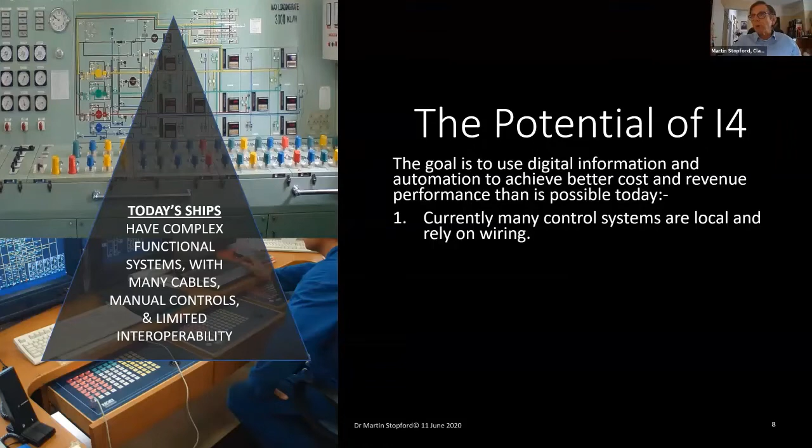Currently, many of the control systems on board ship are local, and the controls rely on hard wiring. There's a few Ethernets being run out, but most of it is hard wiring. I believe we should be replacing cables, controls with ship control area networks, SCAN, I call it. This is already being done in land-based transport equipment like motor cars, and it hasn't been done in ships because it's a more challenging task. They're bigger and more complex, but the opportunity is there to replace wires with messages.

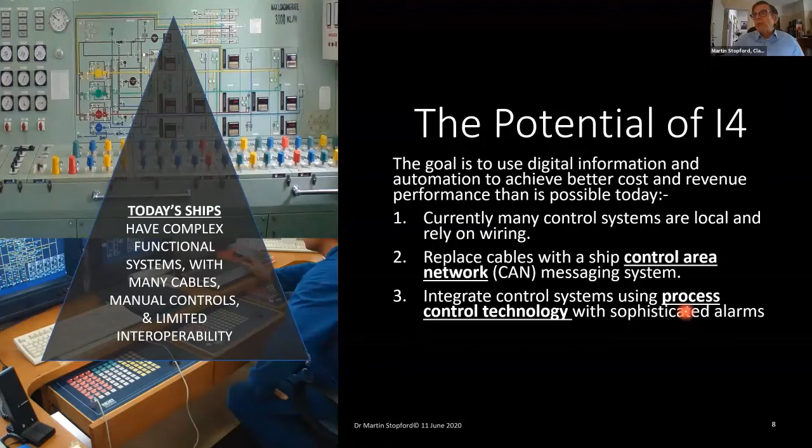And we need to integrate the control systems developed in this way by learning to use the process control systems that are used on land, for example, to run very big, sophisticated chemical plants. And I'm hoping the panel will talk about this a little bit, and automate parts of processes using algorithms where it's safe and viable to do. And so those are the things you do to run the ships.

But in addition, I've said we're flying blind. These systems are going to generate an enormous amount of information and record this information so that we can analyze it and use it to plan what is happening on board ship and in the fleet of ships, so that event logging will be automatic. At the moment, the managers on the ship spend time filling in forms. That will be history. It will all be done by the information systems.

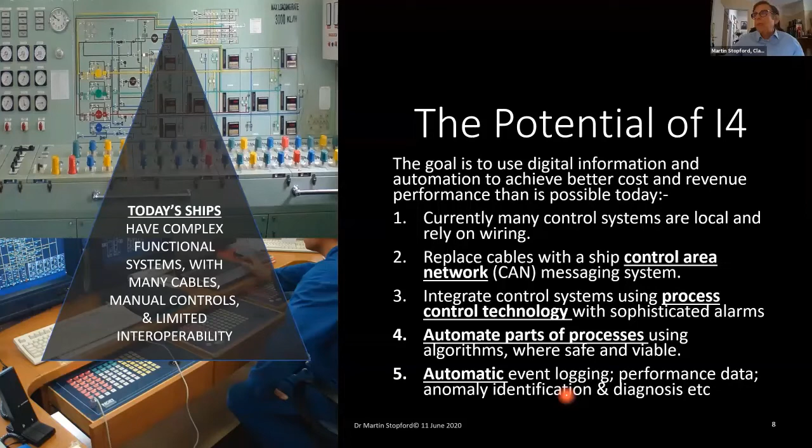And the performance data, anomaly identification, you collect that data and you use it to start to predict errors that might occur, problems that might occur, and prevent them so that you reduce the mechanical problems on the ship. And that really is the main goal. The vision is that we use I4 technology to cut costs. The strategy is to use digital technology to automate processes. The method is continuous improvement.

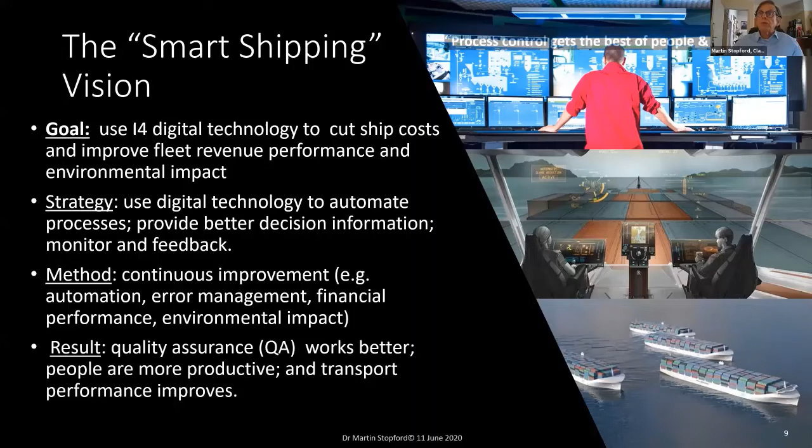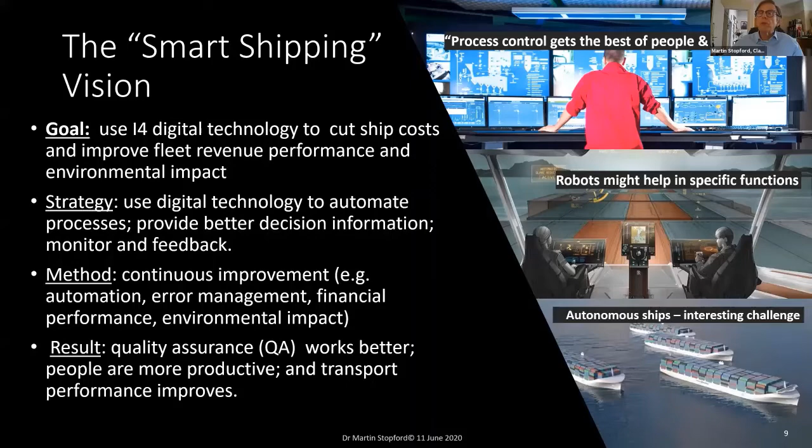You're not going to do all of this at once. You start a step at a time to do the things you can do today effectively. You make sure they work at sea. You make sure they give a financial return and a proper environmental impact. And the result is that your quality assurance works well. I'm a real believer in quality assurance. If you can get that to work, you move to a whole level of management. And you make people more productive, and the transport performance improves in ways that you couldn't even begin to imagine.

I'm not going to dwell on the next two slides, but I just want to make the point that we must have clear goals for costs and revenue. And this slide, this equation shows you the areas of costs on a ship which we can address. These are simple things that the people on the ship do every day today automatically. But with the I4 systems, we are going to be able to get these done much more effectively. We will control our operating costs much better.

We will lower the propulsion costs by optimizing every aspect of that. Never will a ship go to sea with an engine that isn't totally in balance all the time. If you're running a Formula One racing car, you balance at 16,000 RPM, you balance every cylinder, every revolution. You can do that for your ship's engine, and that's just a tiny little example. You reduce electricity costs across the whole operating system because you're monitoring them and getting feedback real time. You reduce your cargo handling costs because you have proper information about what's going on.

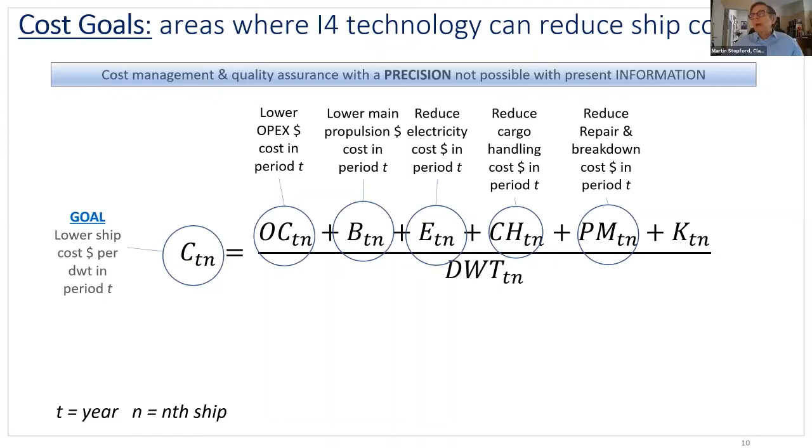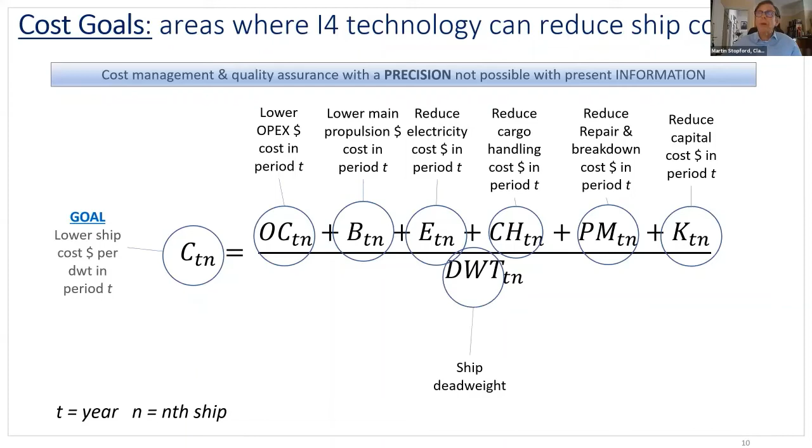I know this is very challenging and a lot of it is done manually, and that's the challenge, isn't it? Repair and maintenance, and the enormous amount of unplanned maintenance and repairs cause a great deal of cost and time. You'd be amazed when you track ships how much time is lost. This is stuff that can be dealt with by predictive maintenance systems. And of course, we use the capital assets far more effectively because there is somebody who is tracking the use of those and the real cost of those assets at any point in time. That is the cost side.

And on the revenue side, ships spend only a small proportion of their time loaded at sea. And once you really know what's going on, you cut out unplanned maintenance, you optimize performance, you get together with the charterers to integrate arrival dates so that you're not arriving and waiting, and you get confidence in the system that you can do that. You don't need to arrive early in case something breaks down. And you fill your ships properly and use their deadweight as much as you possibly can.

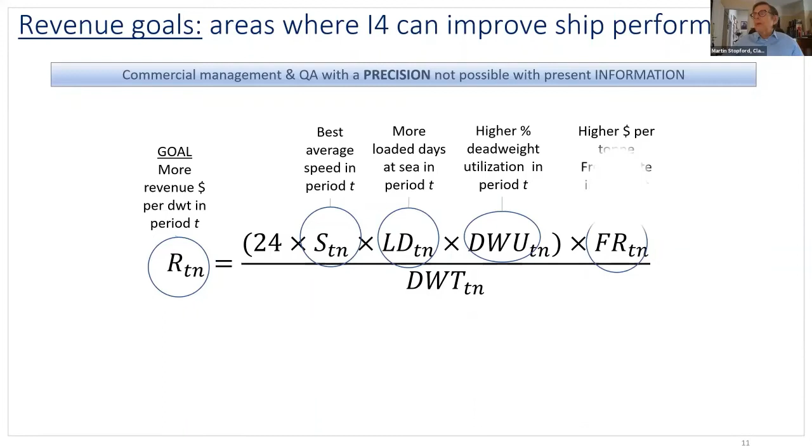And of course, you get the right freight rate, because you get a better freight rate because you're offering a better service. Now, every time I give this lecture, somebody says the charterers won't pay. We have to get closer to the charterers. They have to be part of this whole process.

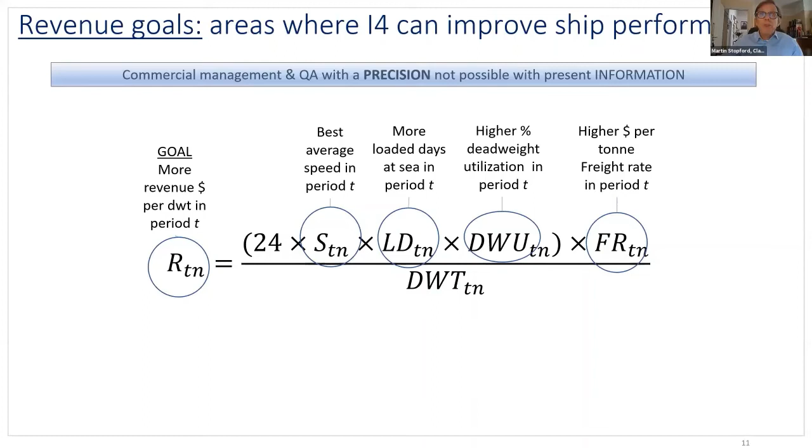They need to be coming back into the process and maybe giving 7-year time charters on new ships which have new technology, which they are a stakeholder in. I think that would be a very, very good way forward as we move into the next generation, especially with this very tough period we have ahead for the shipbuilders. We need cargo back into the equation in shipping.

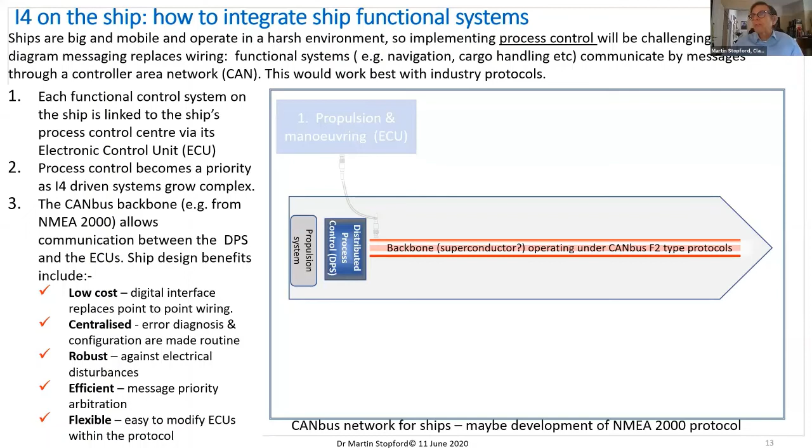How will we make this work at sea? Well, it's a big story. It's a lot of technology, and I don't want to delay because we've got people on the panel who are much more competent to talk about this than I am. But my vision is this: this is an outline of a ship, and I've divided the functional systems on the ship into these 8 groups.

And under the vision, each of these functional systems is a self-supporting integrated system which communicates with the rest of the ship through an electronic control unit, ECU. And each of these systems has an ECU, and the ECU communicates with the rest of the ship through a backbone operating under controller area network, which has protocols which have yet to be agreed.

The car industry has protocols called CAN bus F2, that's the latest version. There is a protocol for ships called NMEA 2000. That is for small ships, and it doesn't address a lot of the big problems that have to be addressed. But it is important that if you're going to have a lot of different systems communicating on the ship, you need protocols so that there are standards.

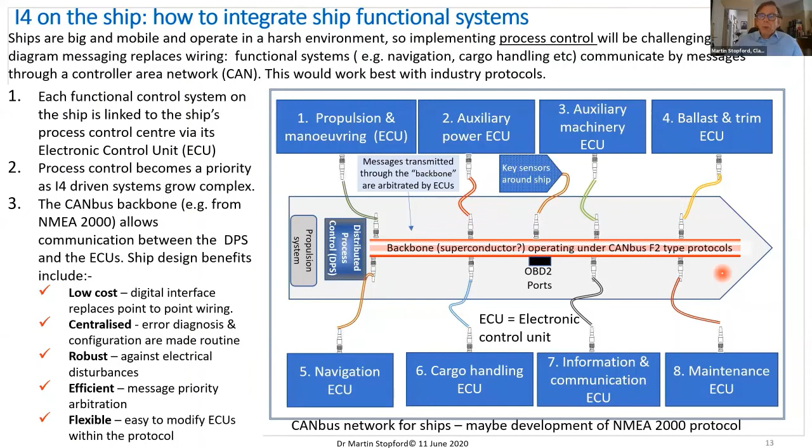And then hopefully this backbone feeds into a process control unit which manages a lot of the operations on the ship, hopefully in just the same way that you might manage a chemical plant on land. So that's the ship. And then we say, well, what happens with the shipping company? Well, I think you try and run the shipping company as a transport factory. They're not running the ships.

We've got groups of people running the ships through their process control operations teams, and they communicate with the company transport management center, which is set up and designed to operate a fleet of ships as though it was maybe a chemical plant. Each of these is a process delivering cargo, and we have commercial elements in this system, and we have much bigger operating systems than you have in existing companies.

I mean, the average bulk shipping company has only 1 or 2 people per ship in the office. I think we're going to have to spend more money here, and we hope we get it back by running a more efficient system. And finally, we bring in the most important people of all, our customers, and we start to integrate them through the commercial side and the systems side. They are integrated. We integrate with the ports.

The equipment suppliers are linked into the shipboard systems and working with the onboard control teams on the ships. And hopefully we go right through transport, and we have business to business transport systems, which is the great objective.

And all of this is monitored, so my vision is that when this gentleman comes in the morning and switches on his computer, he sees the carbon footprint of his fleet yesterday, this week, the trend, the performance of each ship, any anomalies against performance, all of this, and that is the best way to improve performance. Short of a zero carbon propulsion system, that's the way you do it.

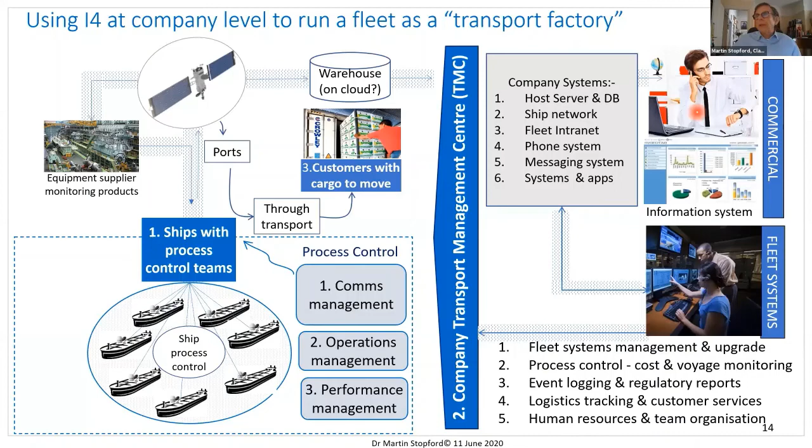And on that note, I'd like to say thank you very much for your attention, and I would just finally remind you that Rome wasn't built in a day. These systems won't appear immediately. We're going to have to do it in waves of technology, and the first wave will be diesel engines. The second wave will be gas and hybrid electric technology. And the third wave is the fuel cell.

And the important thing here is that in each wave, we are building the platform which will eventually be available for fuel cells, the all-electric ship, because with diesel engines, we start to build the I4 technology platform. Then we bring in gas and hybrid. We learn to use cryogenic fuels, and we learn to develop electrical onboard systems operating the gas-powered engine and the electric batteries, and then finally the fuel cell.

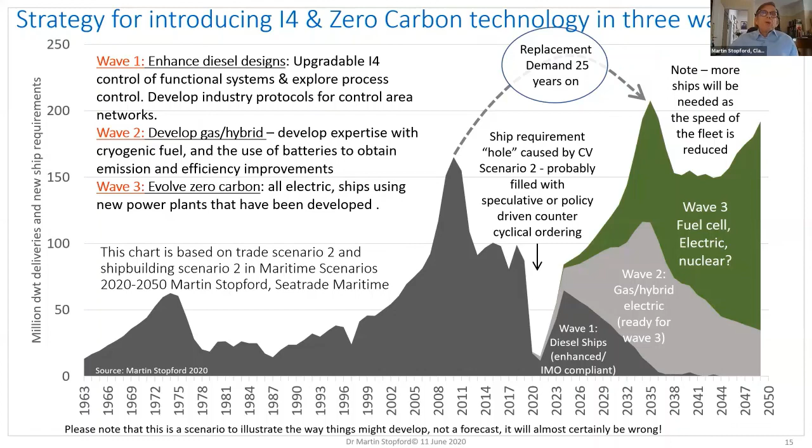And once that's done, we should be ready to go, and we should be able to meet those objectives we've been set by IMO, and hopefully we'll be proud to be members of a business which is leading the world in digital technology.